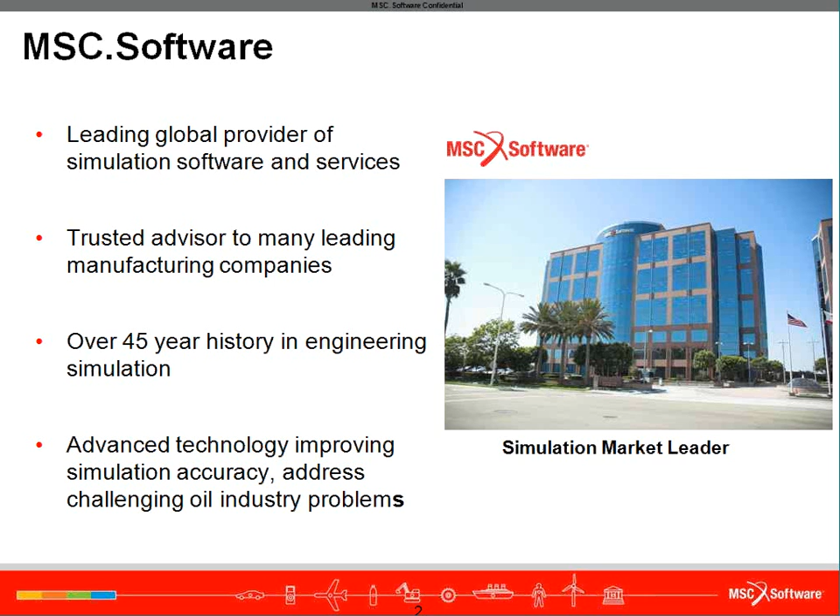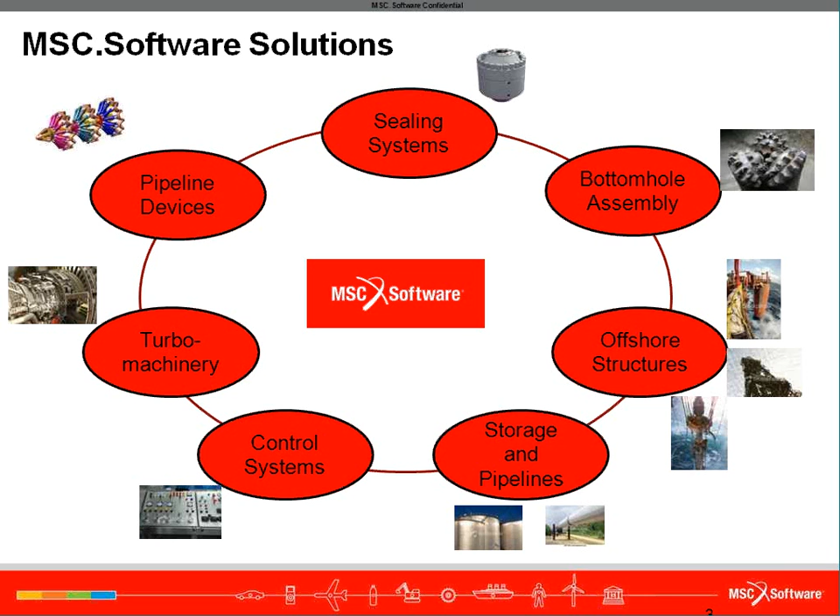MSC's solutions have applications in several segments of the oil and gas industry. A sampling of applications includes sealing systems, including packer seals and blowout preventers, bottom hole assemblies involving contact and wear and tear studies, offshore structural analysis, safety of storage and pipeline structures, control system efficiency, turbo machinery stability and safety, and the pipeline devices used to maintain and monitor these pipelines.

So with that brief introduction to MSC, let us now move on to the central topic of this webcast. After a brief review of the pipelines and the role of inspection devices, we'll go over some of the design challenges involved. After that, Anthony will introduce MSC's simulation solutions for these applications and then go over a couple of examples. We will briefly talk about MSC's solution to manage the simulation data, and then we'll have a Q&A session to address any questions that you may have on today's presentation.

Pipelines are very efficient transportation systems, both in terms of operational costs and energy efficiency. The large, complex network of pipelines spans hundreds of thousands of miles across the world, and depending on the location and usage, these pipes are of varying diameters, going from as little as 2 inches to as big as 60 inches in diameter. So depending on the location of the wells and the final destination of the product being pumped, the pipelines may be underground, undersea, or over the ground.

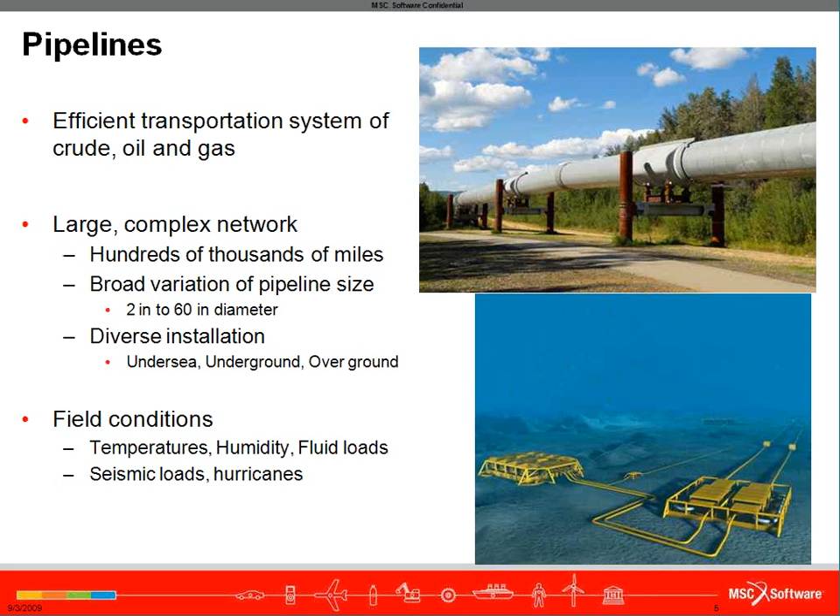As the oil wells are located in all kinds of climates and locations, going from Arctic permafrost regions to deep offshore or very hot desert regions, these pipelines have to withstand very punishing environmental conditions, including very low and very high temperatures, humidity, wave loads, and other corrosive environments. In addition, they should also withstand dynamic loads due to extreme weather conditions and earthquakes as well.

Failure of a pipeline could result in shutdown of that segment and could lead to excessive operational expenses and loss of revenue. The environmental and political impact of catastrophic failure could also be very significant. I'm sure everyone remembers BP's pipeline shutdown 3 years ago, just when the oil prices were spiking. To avoid failures and to maintain efficiency, continuous monitoring of these pipelines is necessary. Monitoring is also important because visual and direct maintenance is harder, since most of the pipelines are inaccessible, being underground or undersea. And even when they are over land, they could be in rugged terrain, making regular access very difficult.

Since energy is crucial for economic growth and also due to environmental impact concerns, government regulations affect their operations and maintenance. In the U.S. alone, the National Environmental Policy Act, Clean Air Act, and Pipeline Safety Improvement Act are just a few of those that affect the installation and maintenance of the pipelines.

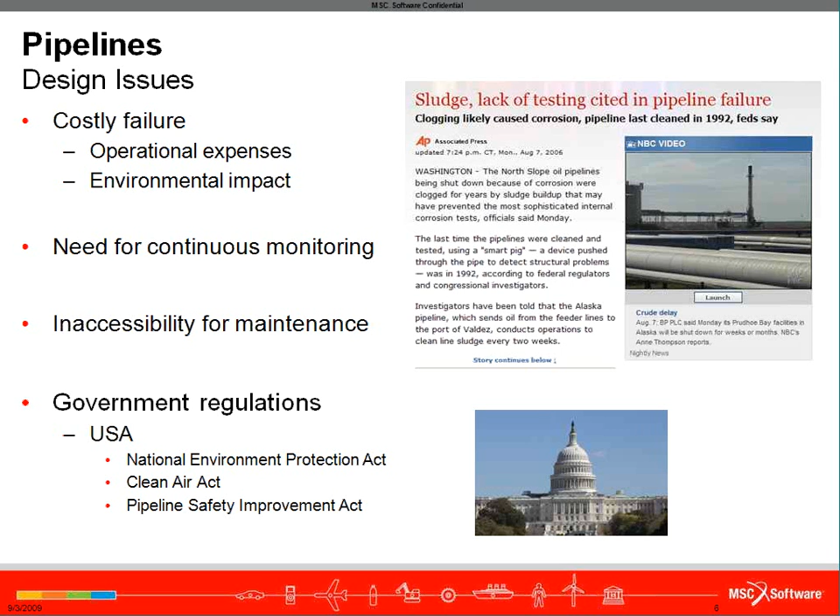One tool that is indispensable in pipeline monitoring and maintenance is the pipeline inspection gauge, also called a PIG. Basically, a PIG is any device that is inserted into a pipeline that can travel freely through the pipeline. PIG, of course, is a backronym for the devices used to handle several operations related to pipeline maintenance and monitoring. They're used both during commissioning and operational phases.

During construction, soil and construction debris could make their way into pipelines and cause problems during operation by blocking downstream filters or damaging pump impellers and so on. By running a debris removal PIG, operators make sure that the pipes are cleaned up before usage. And often the landline debris removal operation is combined with gauging to detect any kind of dents and buckles. This ensures that there is a circular opening from one end to the other. It is even more critical in offshore operations to ensure that any areas susceptible to buckling are within the acceptable tolerances. And PIGs are also quite helpful during cleaning operations, flooding with water, and dewatering stages as well.

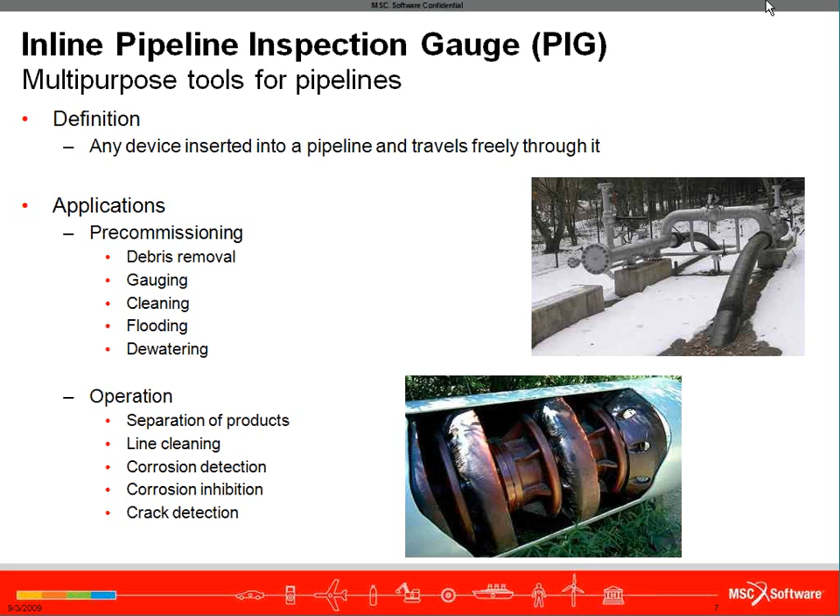Based on the tasks that they perform, PIGs can be classified into two main categories, utility PIGs and smart or intelligent PIGs. Utility PIGs perform a specific task in maintaining the pipeline. Examples include those involved with debris removal, dewatering, and so on.

A smart PIG, on the other hand, measures and records information that is used to assess pipeline integrity or perform non-destructive assessment of pipeline defects or bore diameter. Smart PIGs came into use in the 1960s and are finding increased usage in monitoring of pipelines. There are three main types of smart PIGs based on the technology that is used.

Caliper PIGs have an array of levers and are connected to a recording device in the body. As the pigs travel through the pipeline, the deflections of the levers are recorded, and the results can show details such as girth weld penetration, pipe ovality, and dents.

The next one is the MFL, or magnetic flux leakage pigs. They use a more sophisticated technique to determine the wall thickness over the entire pipe surface, as well as picking up any dents and buckles and pipe ovality, just as in caliper pigs.

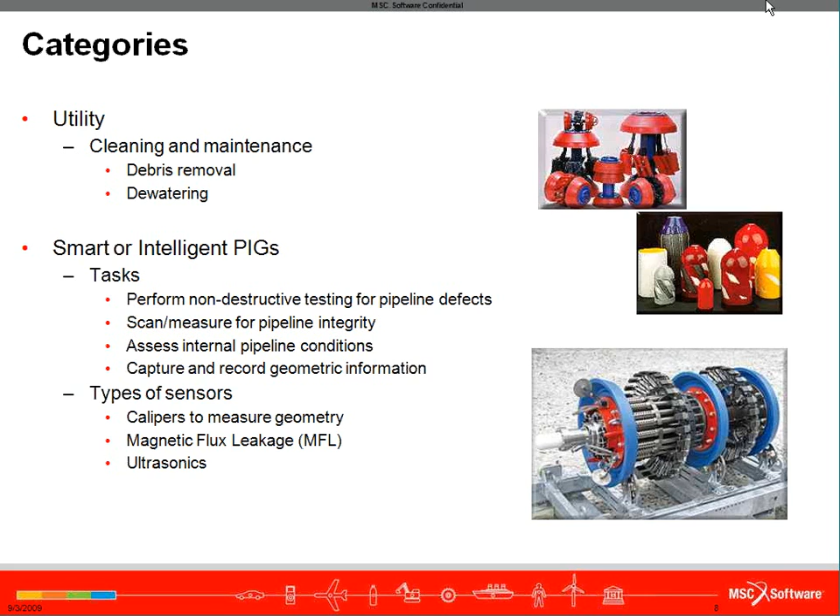So when designing smart pigs, or for that matter any pigs, designers should consider that these pigs need to traverse very long distances in a single run without getting stuck. They could be run for tens or even hundreds of miles in a single inspection run. So retrieving a stuck pig would actually be much more expensive than a pig that just fails to perform the inspection task but makes it to the retrieval station.

The pipeline diameter varies across the length of the pipe, and so the pig should also manage the transition smoothly, and the same goes with the curved sections as well. There are also several standardization specifications that need to be accounted for by the designers in the designs.

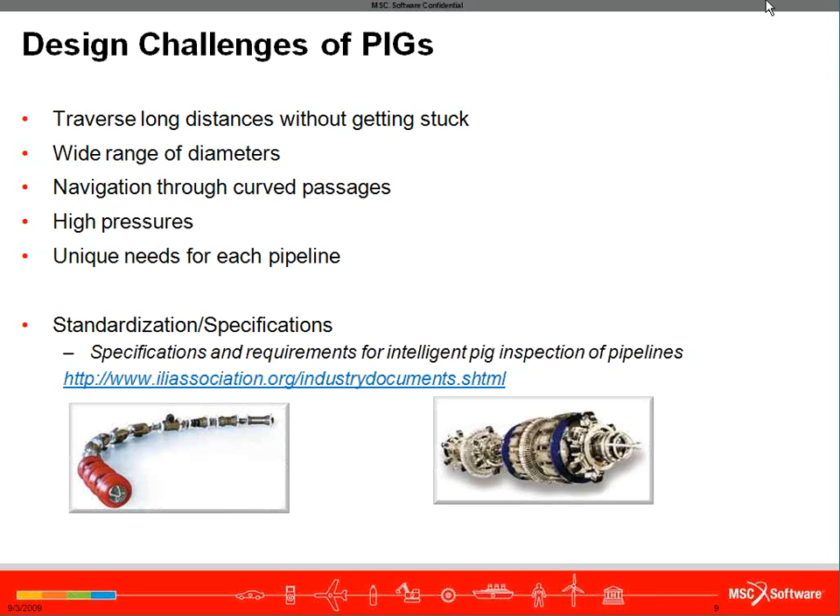Obviously, physical testing of all these pigs for all the possible scenarios is not only expensive, but also very time-consuming. So a trial and error solution can slow things down and possibly lead to a suboptimal design as well, because you don't get a chance to try out a lot of different variations. Simulation helps with virtual testing of the pigs prior to getting your final prototype, thus saving design and development time and other costs.

So at this point, I would like to turn it over to Anthony, who will discuss how simulation and specifically MSC solutions help you tackle the virtual testing issues and go over some examples. Anthony, please take over.

Thanks, Srinivas. I'll now present some topics related to multi-body dynamics modeling of pigs with Adams software. I'll start by showing where Adams fits within MSC's product portfolio, after which I'll briefly describe what multi-body dynamics simulation is and why so many companies use it. Then I'll explain why Adams is an excellent software tool for this kind of simulation. Finally, I'll present two pig modeling examples. The first comes from a project from one of our customers, and the second is an example model from MSC, which we'll investigate directly within the software.

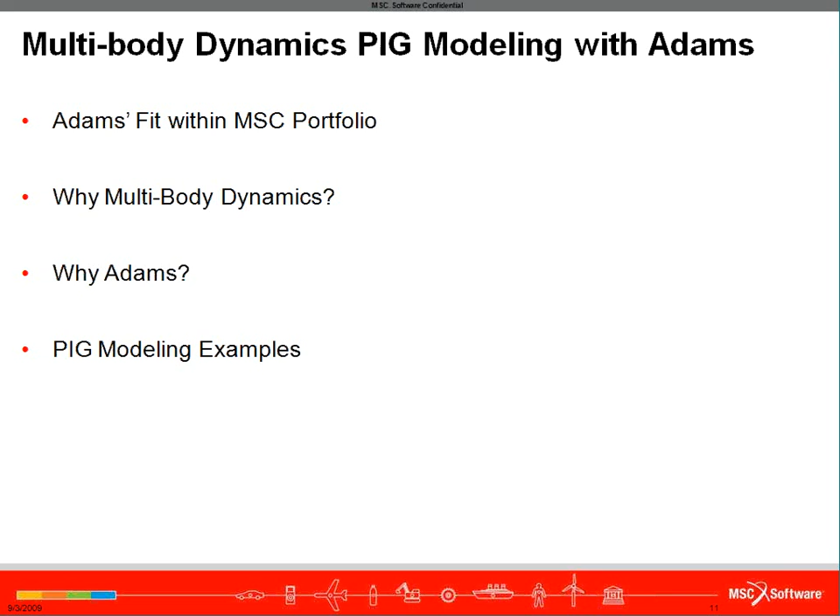MSC's product portfolio is aligned with our customer simulation initiatives. Our customers create virtual prototypes, manage the data and processes associated with them, and partner with trusted industry experts to develop new methodology and best practices, and to apply the tools to new platforms.

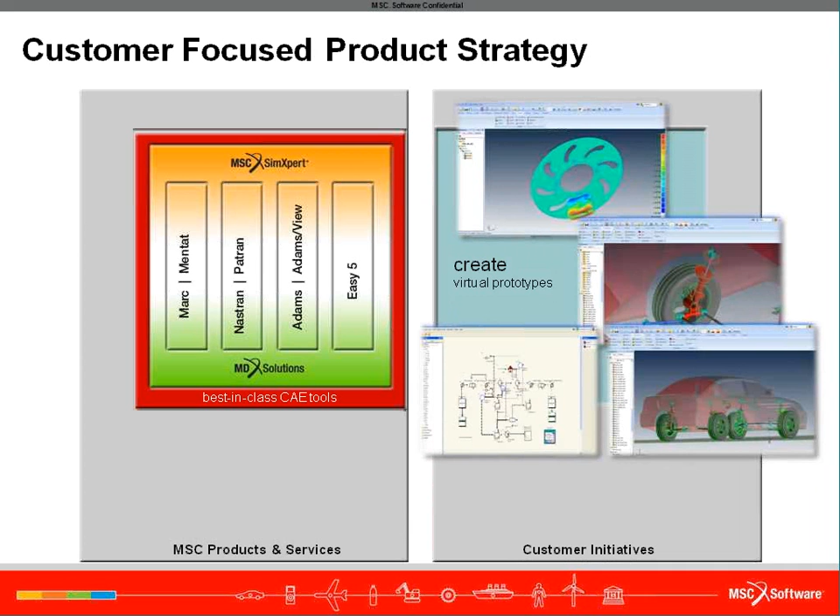Supporting the creation of virtual prototypes are MSC's CAE tools. Alongside our offerings for linear and nonlinear finite element analysis and other disciplines is the Adams product line, our core solution for multi-body dynamics. Supporting the management of CAE data and processes is our Sim Manager tool.

And finally, our services team offers a broad wealth of expert knowledge and experience to assist our customers in expanding their virtual product development capabilities and pushing the envelope in the simulation world. Together, these pieces enable our customers to achieve their goals of improving and accelerating their product design cycles, optimizing the methodology of product design, and shaping the future of engineering and product development.

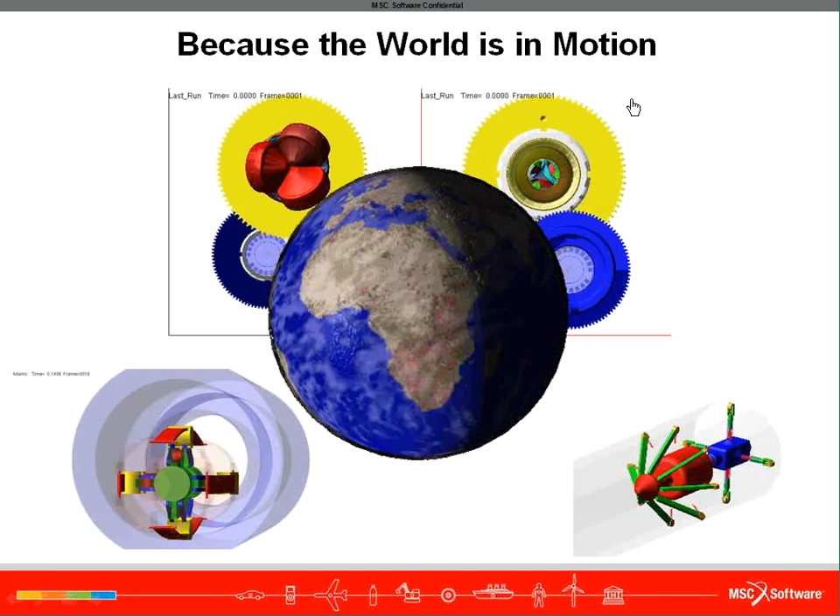Now we've established that Adams is MSC's solution for multi-body dynamics, or MBD for short. Well, let's answer the question, why engage in multi-body dynamic simulation at all? Why? Well, because the world is in motion. The things we work with, the things we design, the things we engineer, they all move. So multi-body dynamics is required. A few examples of things in motion related to the oil and gas industry are shown here.

This is an animation of a model showing gears in a drilling application. This here is a centralizer for pipe tools. Again, an Adams model animation directly from the Adams post-processing tool. And last, far from least, the subject of today's webinar, a pipe survey device, a PIG.

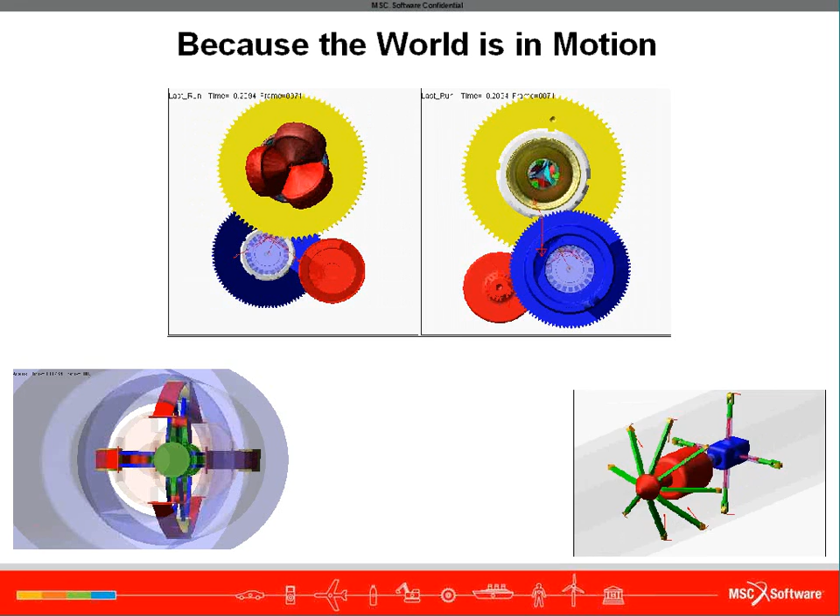Okay, moving along. For those of you unfamiliar with MBD, I'll provide some background. Multi-body dynamics is the evaluation of any system comprised of bodies. In the parlance of Adams, these are known as parts and can be rigid or flexible. Acting on these parts can be a variety of constraints, either ideal or complex, as well as forces applied from external of the system or as a result of interactions between the parts. MBD solutions enable a system-level analysis, allowing us to study the interaction between multiple components in an assembly.

Let me address two terms often applied to this discipline. The first is kinematics. Technically speaking, this term's application is limited to zero degree of freedom systems. That is, a system where all of the motion is prescribed exactly. It is often used to refer to simpler analyses, sometimes even non-zero degree of freedom systems, consisting of motion-driven systems, frictionless connections, ideal joints, and the like, useful primarily for basic motion visualization.

It sometimes is, but should not be, confused with the second term, dynamics. Technically speaking, this term is applied to multiple degree of freedom systems. In general, it's referred to as covering far broader capabilities and modeling complexity, such as force or torque-driven systems, realistic connections representing things like slop and friction, the inclusion of flexible bodies, contact modeling, etc. Most applications of Adams fall within the realm of what we call dynamics. PIG modeling is no exception.

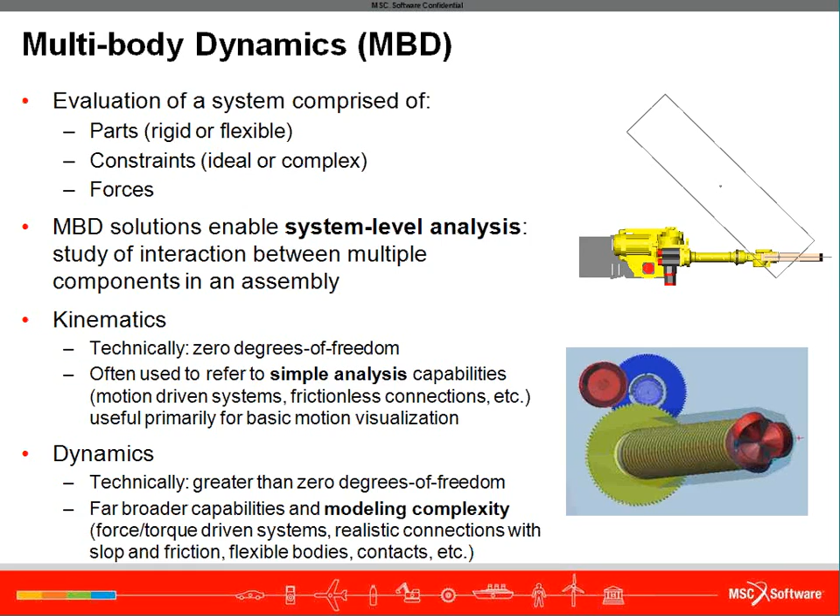I'll now describe some of the product design challenges to which MBD analysis is often applied. First, system-level analysis. Many design problems stem from a lack of understanding or anticipation of how a product's components interact with each other and their environment. This really requires a subsystem or even a full system level viewpoint. Let me illustrate what I mean with an example from a services project I once worked on for a customer.

A brake noise warranty issue came up on a car. The OEM blamed the supplier and wanted cost relief. The supplier couldn't replicate the noise on bench tests and believed the issue to be an interaction between the brake and the suspension. It turns out that during certain events, the brake was exciting a natural frequency in the suspension trailing arm on which it was mounted, which produced the audible noise.

A detailed model of the brake on the vehicle suspension, which included a flexible body representation of the trailing arm, supported this theory. The Adams model was then used to test countermeasures on both the brake and the suspension, one of which, a stiffening ridge stamped into the suspension arm, was the solution ultimately implemented.

System-level analysis is really an overarching theme that touches on many of the other design challenges listed here. The next of which is the prediction of loads. Static loads are often easily predictable and well understood. Dynamic loads, however, are far more difficult to predict and understand.

Take a washing machine, for example, here, as shown in this animation. Sitting static on its suspension, it's not so complex, but place an unbalanced load in a basket rotating at several hundred RPM, and you have a more difficult problem. The movie I played showed how moving some of the components on the outside of the tub helped Sanyo reduce the displacement of one of their industrial washer designs.

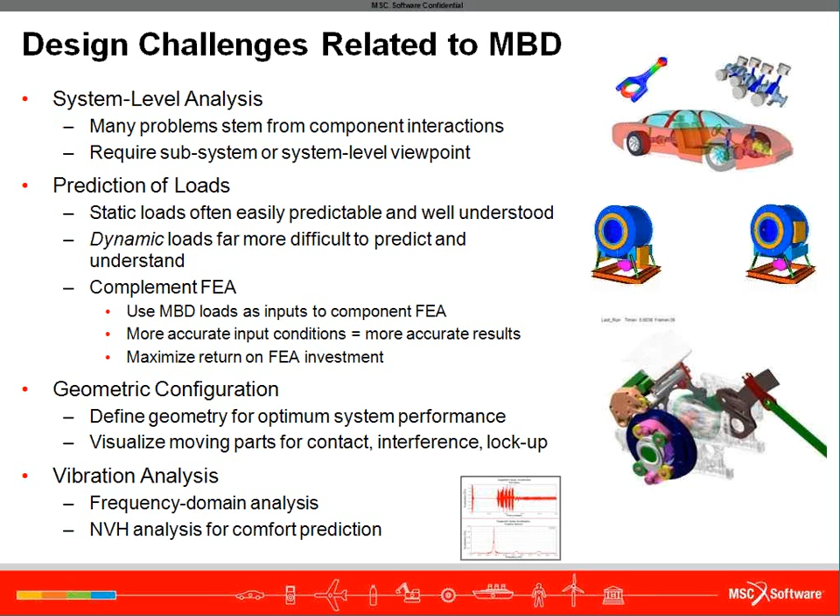MBD is also often used to supply an accurate mechanical model for control system modeling. After all, one needs to understand the mechanical system being controlled. This can be difficult in a system with several moving parts, complex interactions, and dynamic phenomena. MBD provides this representation. For pigs that are self-propelled by a motor as opposed to propelled by flow, this can be very useful for motor sizing and design.

Naturally, MBD is an efficient solution for problems with moving parts. MSC often encounters folks trying to do too much with FEA and applying it to problems for which it's not well suited. This can cause excessive run times. An MBD solution is often more efficient than FEA for systems with many moving parts that can be represented as rigid bodies. MBD simulation enables representing flexibility and compliance only where really required. With all their moving parts, many pig applications would not be well suited at all to an FEA-only approach.

Finally, like other simulation disciplines, MBD allows folks to benefit from design study, DOE, and optimization techniques by quickly assessing multiple design variants so that the interaction factors can be understood and an objective versus parameter response surface can be defined.

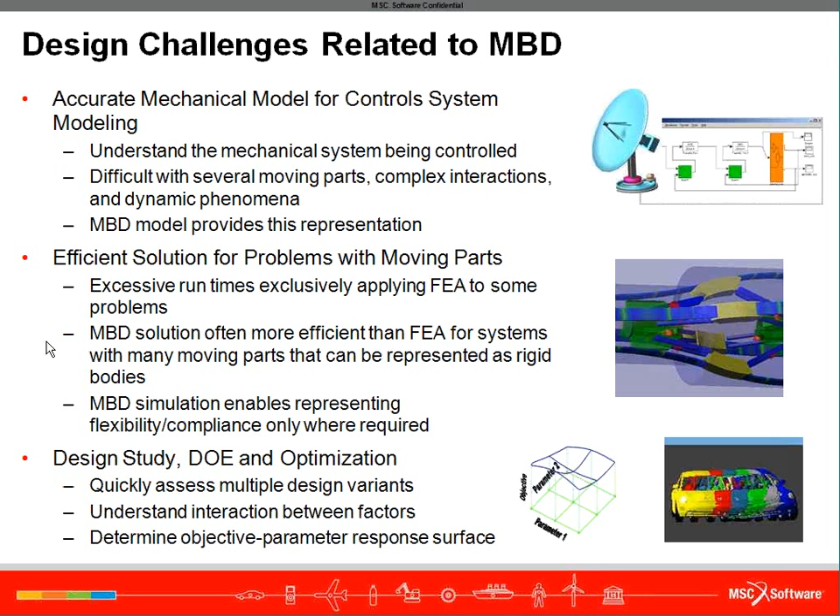Also, it should not go without saying, especially to those of you new to simulation in general, that the general benefits of simulation, which MBD as a subset of simulation provides as well, are part of the MBD picture. Accelerate innovation by exploring multiple design concepts quickly and efficiently so you can reduce your time to market.

Increasing product quality is another benefit. Simulation can help you to identify issues prior to production and reduce warranty claims, as well as quickly develop countermeasures whenever issues are discovered. Don't get me wrong, we always want to avoid and address problems upstream. The reality is that problems may still occur late and put us in firefighting mode. This is also a valuable time for simulation. Many of our customers first get involved with us during such crises and then go back later and revamp their design processes to include more simulation earlier.

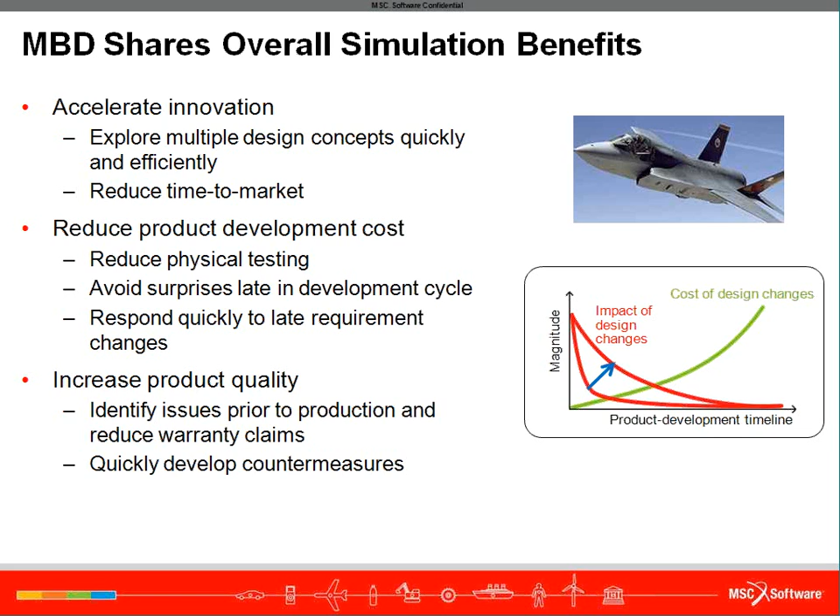Well, now that I've discussed why MBD, let me touch on why Adams is an excellent choice for your MBD solution. The Adams product has over 3 decades of development, innovation, and industry leadership, and is the most widely used mechanical system software in the world. It has great depth and breadth of functionality, allowing you to address all the topics discussed earlier, and this is balanced with ease of use and customizability for specific industry applications. This is achieved through MSC or third-party product plugins, as well as by direct functionality in Adams, allowing users to customize the interface and automate the modeling process.

And because Adams is the most widely used software in its space, there's a large, diverse, active user base with which to interact through conferences, our online user forums, and the like.

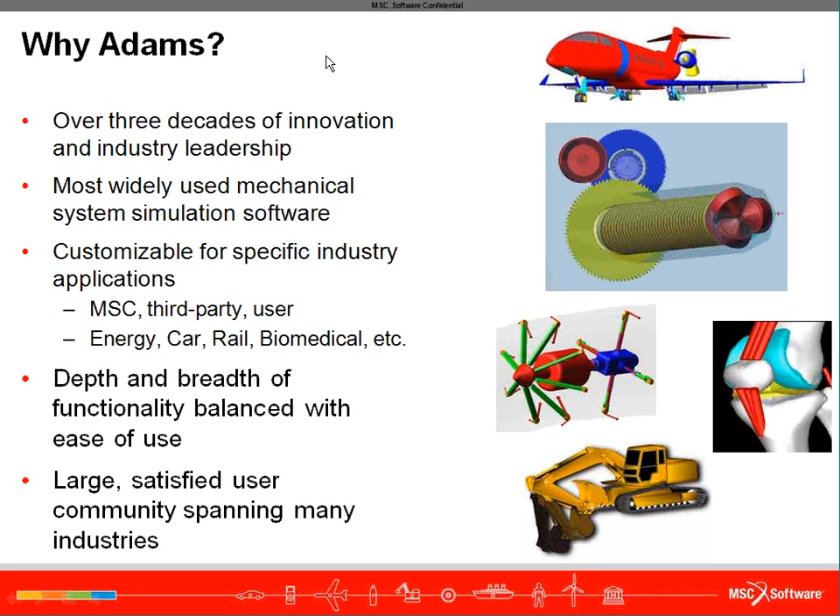Okay, moving on to the example section of our presentation. Let's now take a look at 2 pig modeling examples. This first one comes from one of our customers, Pipetronix. They're now a part of GE Energy. They presented this model at the 2000 International Adams Users Conference.

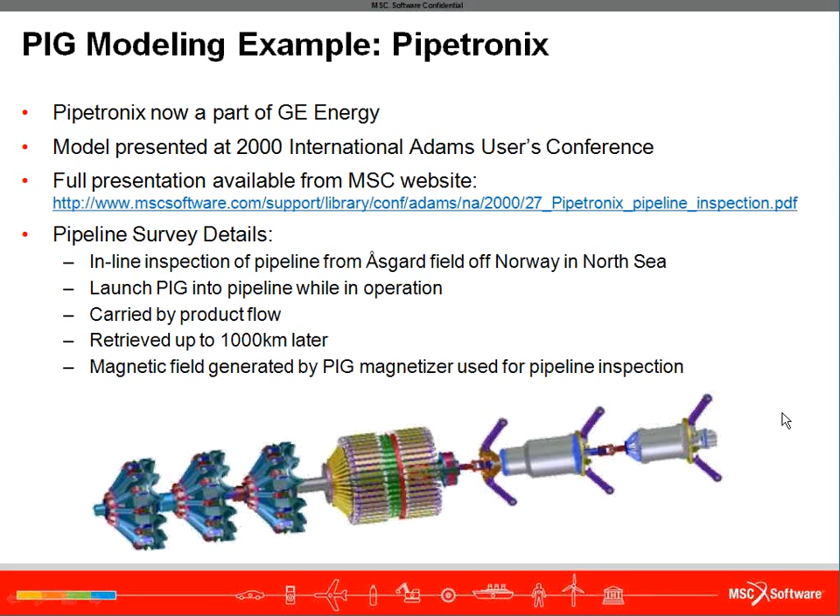The primary challenging requirements for this device were as follows. It had to have a 28-inch compressed diameter at launch, must be able to travel via a service riser or be launched subsea at a depth of 300 meters. The pig has to travel the export riser base and a section of 28-inch diameter pipeline, travel the transition cone, and then travel 800 kilometers of 42-inch diameter pipeline to shore, including a landline and a crossing of 3 fjords.

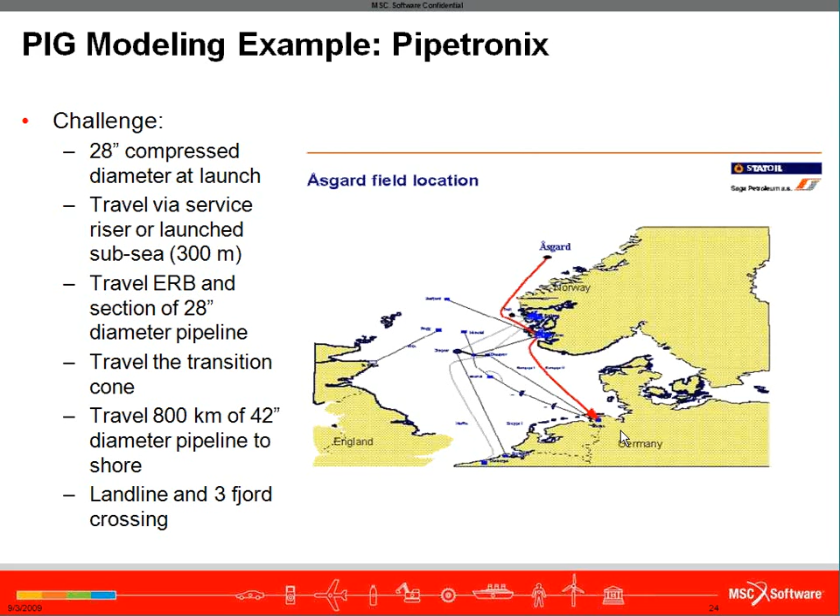Now let's discuss the model a little bit. The model was started from geometry and mass properties imported to Adams from their CAD model. The flow-based propulsion was represented by 5 force elements applied to each of the 36 tow arm cup elements. These are the tow arm cup elements along here in the tow sections. The locations of these 5 force vectors are shown on the diagram here as F1 through F5. Here and here, here, and down the middle here.

These forces are a function of pipe diameter, and the defining functions were based, at least in part, on empirical data. A combination of various Adams constraint types were used to properly connect the tow arm and magnetizer linkages so as to represent their ability to expand and contract. In total, 865 separate contact forces were used in the model. The force values and contact detection all referenced a Fortran subroutine, which was called by the Adams solver during the simulation. This technique, while efficient, is no longer necessary, as you'll see in the next example.

As you can see, this model has many repeated components in the tow arms and magnetizer. The analyst took advantage of the Adams scriptability to create macros, which can be played back to quickly repeat modeling construction steps and vary the number of all of these repeated components.

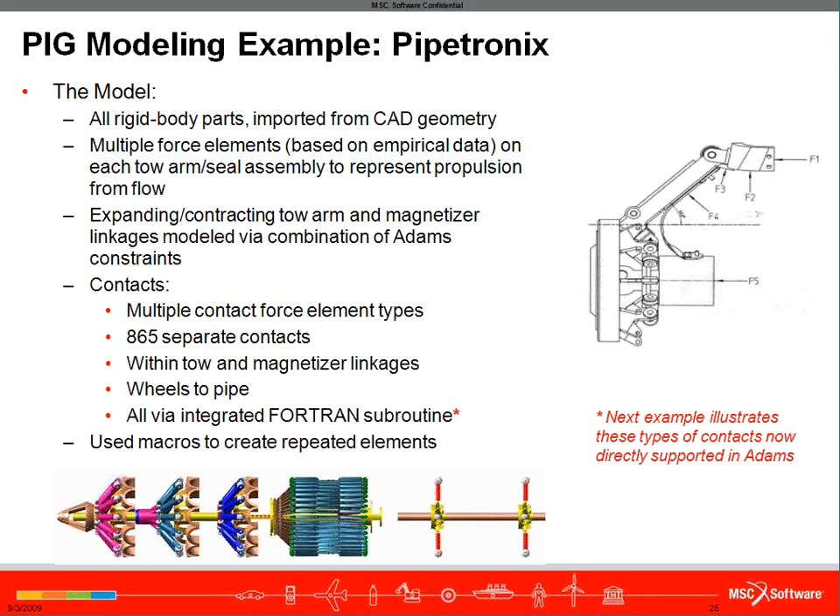This model was used primarily to investigate dynamic loading of the pig's various mechanisms, especially the relatively delicate magnetizer linkages, and it was used to assess the ability of the pig to traverse the pipelines, transitions, welds, and bends. Pipetronix presented the conclusion that, quote, Adams provided comprehensive data which contributed to the understanding of system behavior prior to completion of hardware prototype and testing. These folks clearly understood the value of performing this kind of analysis upstream in the design process.

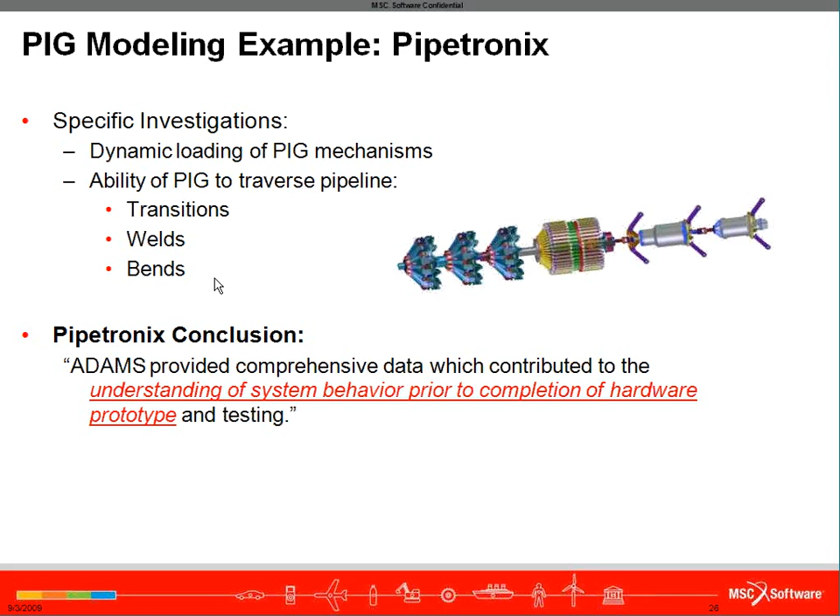So, moving along, next I'd like to show you a demonstration model of a pipeline survey device. The animation here shows the model as it traverses a sample test course, just to give you an idea of the model itself and the simulation event it traverses.

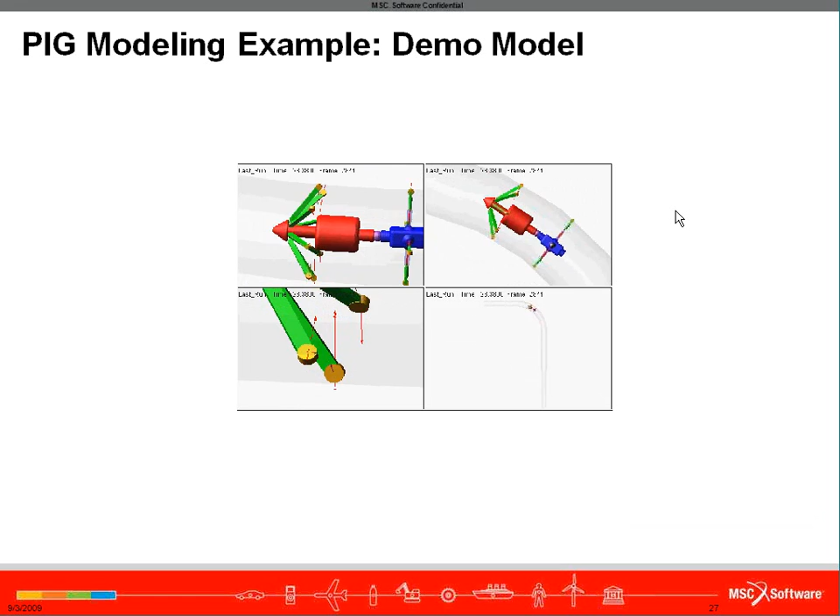Okay, I developed this model as a generic representation of a pipeline survey device. None of the geometry or model parameters intentionally represent any actual devices in production or development as far as I know, but I tried to make it somewhat representative of a likely scenario. This model is far simpler than the Pipetronix example previously shown. I have just 2 units, a front unit and a rear unit. The front consists of 8 arms which are mounted to the base by torsional spring dampers whose preloads are used to maintain contact with the interior pipe wall.

The front unit is the towing unit. It has a simple single force applied down the center line of the pig that is fit with a basic PID controller to achieve and maintain a constant velocity. The rear unit is coupled to the front and pulled along. It has only 4 arms made of struts connected via translational spring dampers, which similarly are preloaded to maintain contact with the interior pipe wall.

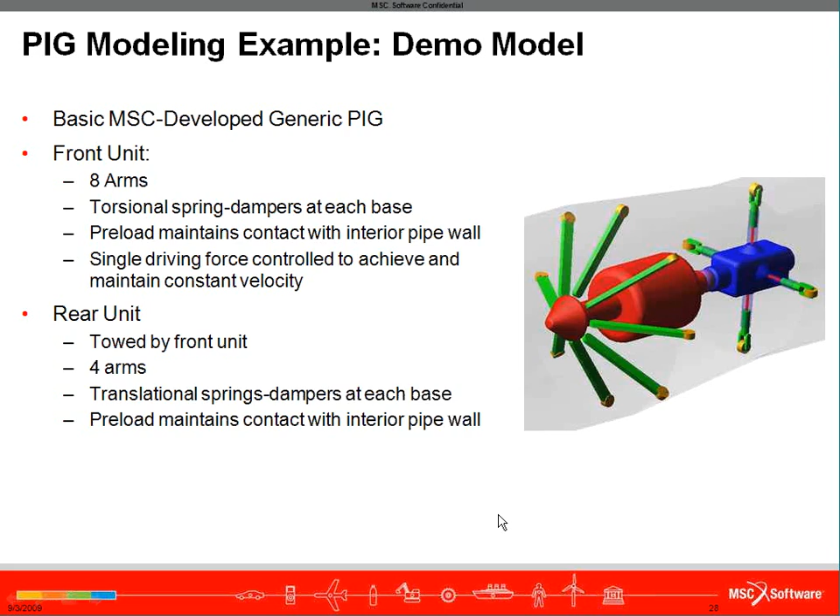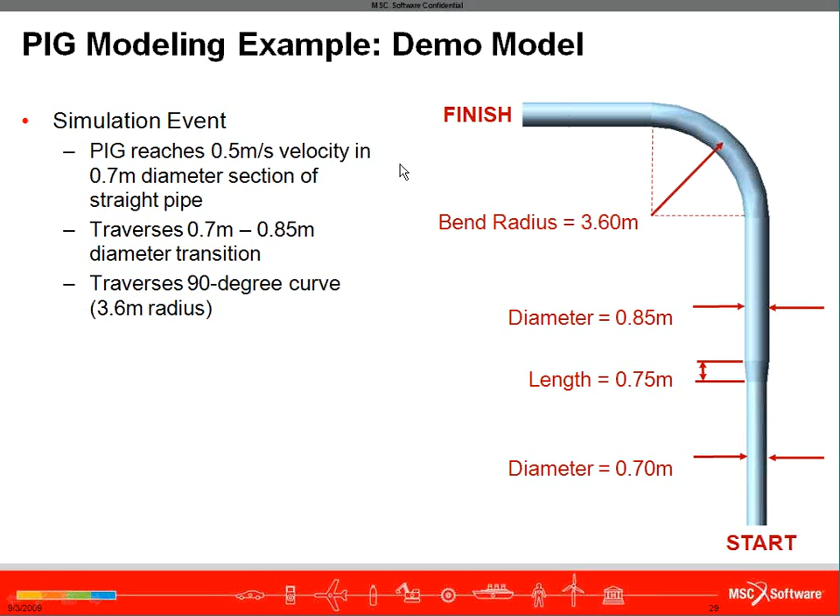The key feature of this model from a product functionality standpoint is that it takes advantage of the most recent generation of Adams contact modeling capabilities. Back in 2000, none of this functionality was built into the tool directly, so they had to write their own functions and chose to do so via an integrated Fortran subroutine, as we learned just moments ago. Since then, several types of contact modeling capabilities have been built into Adams.

Today, these include solid-to-solid contact for 3D rigid and 3D flexible bodies, as well as contact for rigid body 2D elements. Any combination of supported bodies is allowed. Also, spheres are treated with an analytical method which uses the geometric property of the solid to reduce the time required to compute contact information. Other rigid solids use the so-called rapid method, which uses tessellated surfaces to detect contact.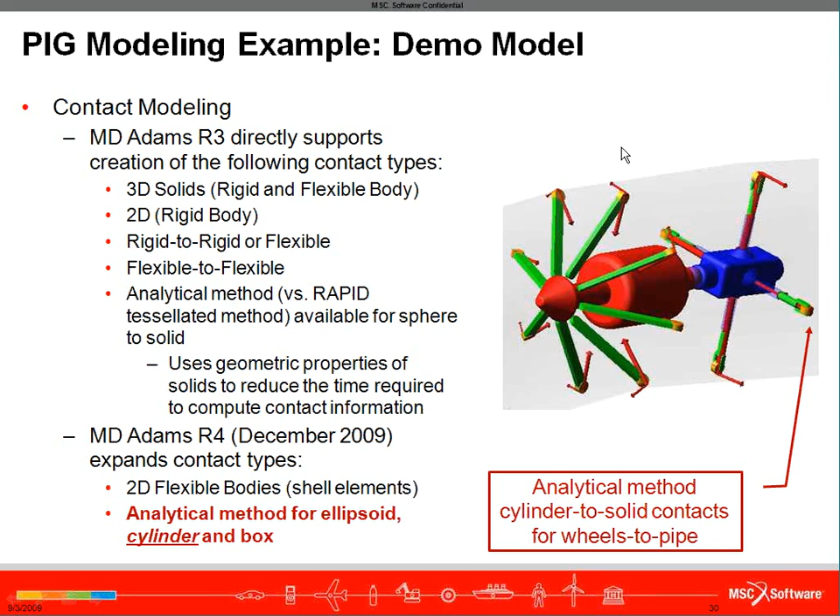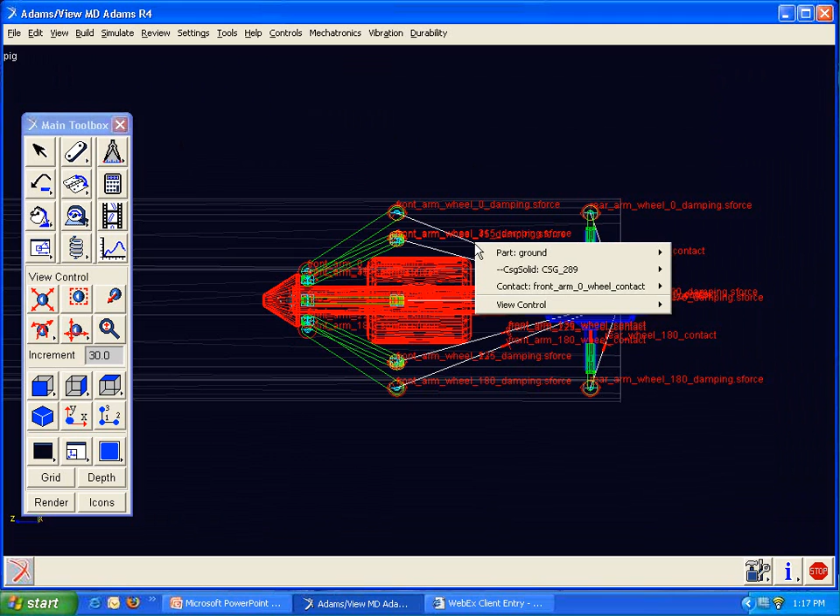So I'll now switch to an Adams session so we can take a closer look at the model live in the software. So this is Adams, and this is the model in the software preprocessor Adams View. Let's take a look at one of the contact forces here between one of the front arms and the pipe. If I select Modify, you can see all the properties of the contact force. Very simple. It simply bases itself on two solids, any two selectable geometries. So it's very quick to create.

I have some settings here that define how the normal force is defined. We use what is called an impact function in Adams, basically a Hertzian stress theory-based contact model. So it looks for an intersection of two solids and then applies a stiffness, which is raised to a certain exponent, as well as applies a damping that's ramped on across a certain penetration depth. Friction is also modeled in these contacts, a Coulombic friction model with a static friction coefficient and a dynamic friction coefficient, which transition across a given velocity span.

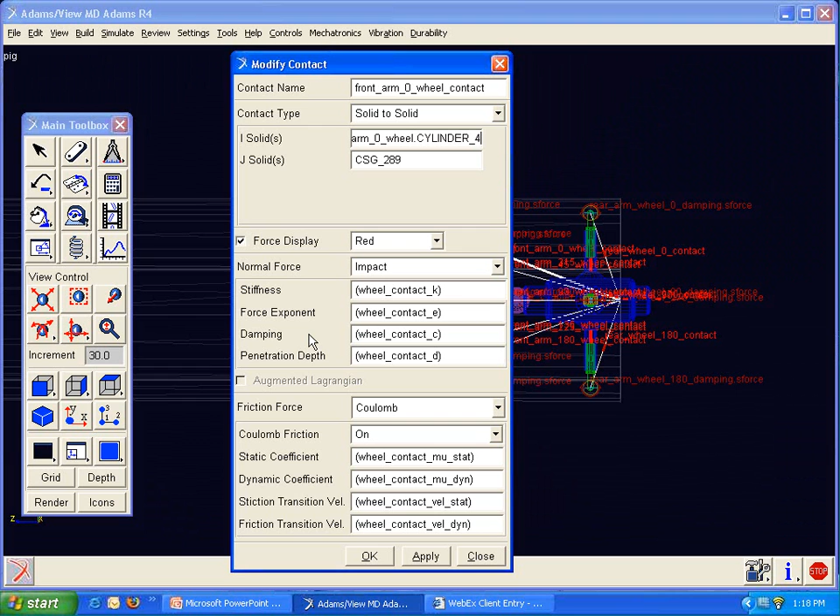Just to look at the ease of creating these contacts, we'll actually delete this contact here and recreate it briefly. So in order to do this from our force palette, simply select the contact force item, and then I can simply pick the contact solids I'd like to use, either directly clicking in here or right-clicking and finding the cylinder I'm primarily interested in. So I picked the two solids, and that's all that is required to determine the bodies that are going to contact. I don't need to set up any predefined contact regions or contact detection regions. Just simply tell it two bodies, and whenever they contact, please turn on the force.

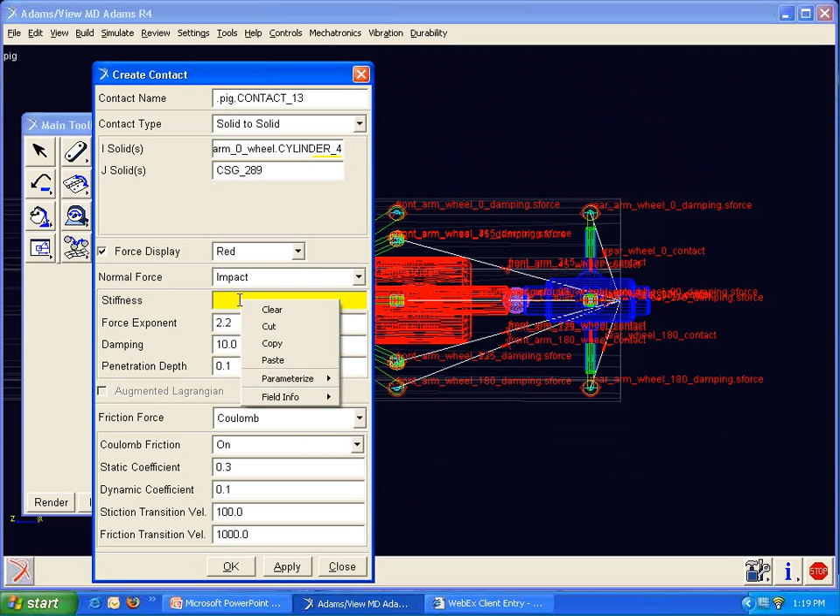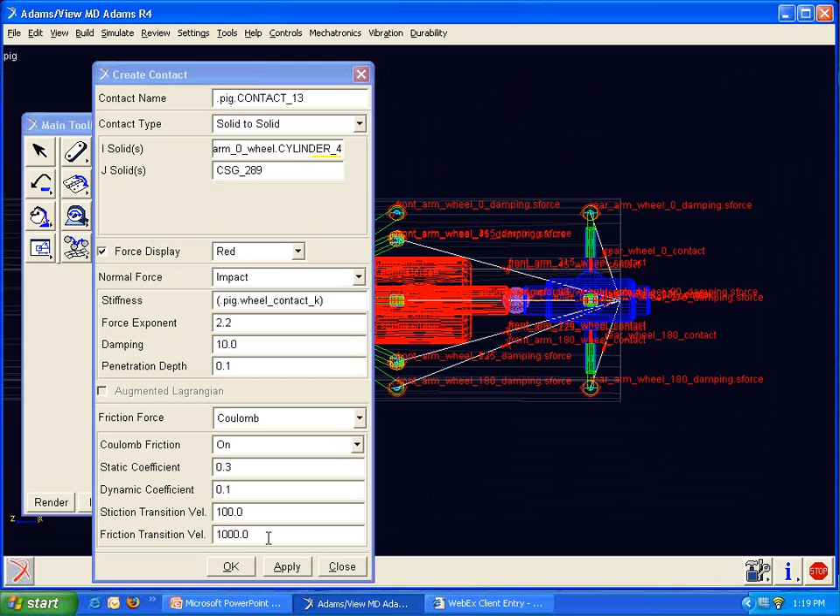Defaults are applied here. I've fully parameterized the model so we can actually look at referencing design variables for these things. So I've set up design variables for all of my contacts. So I could apply my own contact design variables here, wheel contact K, the same one that's used in all 12 of my contacts. So all I need to do if I would like to change the contact parameters is edit any of these design variables. And we'll go through and fill all these in, but you get the idea. Very easy to create this contact, and all of a sudden there it is. My contact force element has been created and it exists.

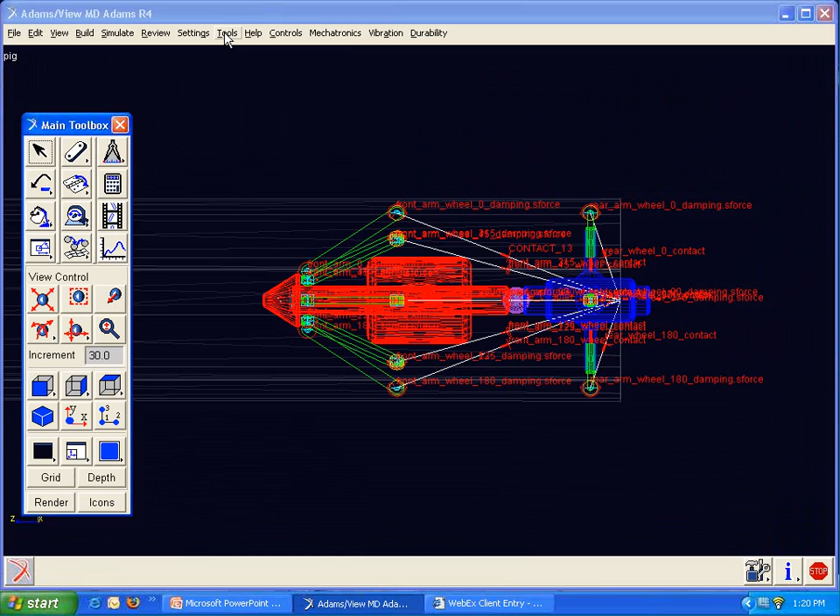There are also springs in this model. As I mentioned before, you can see the preloaded springs are existing at the bases of both of the front and rear units. Their properties are parameterized as well. If we look at one of these springs, we can see again we're referencing design parameters for these three spring properties. And again, because these are spring properties that cover all the various front springs, for example, I can modify those single properties by something like our table editor here. I can go through and modify any of the spring preloads in the front or the rear, or any of the other spring properties in the front and the rear, very quickly and very easily through this interface.

So let's take a look at the post-processing tool. This is the tool I used to create some of the animations you saw, and it's also the tool we use to investigate any of the results, both plotted and animation, as you can see here.

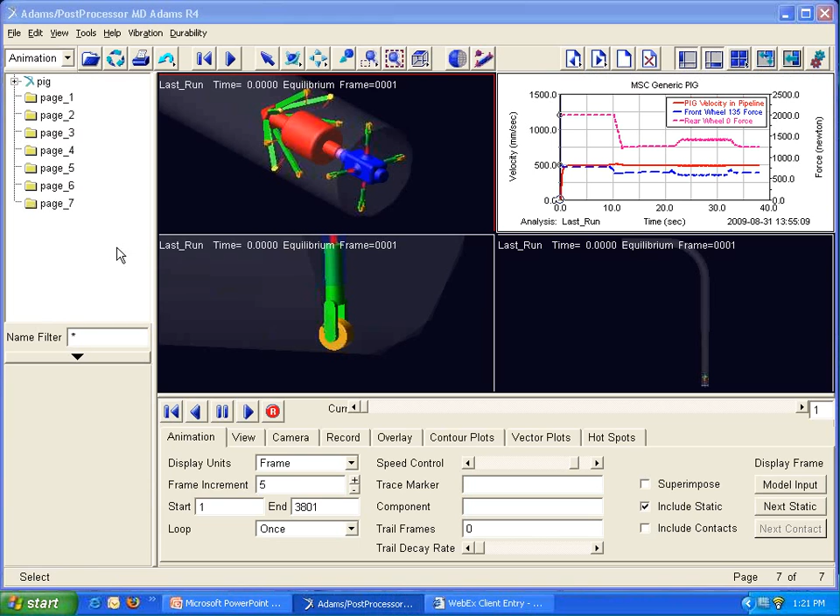So what I'll do here is animate the model and run it through its course again. This time we've got a four-view look at the model, three animations rolling here, all staying in sync, as well as staying in sync with this plot. So you can see as it just runs through the transition there, you can see the contact forces and the wheels drop a bit because obviously the spring preloads are unloading themselves, so they're not pressed up against the wall of the interior of the pipe so much.

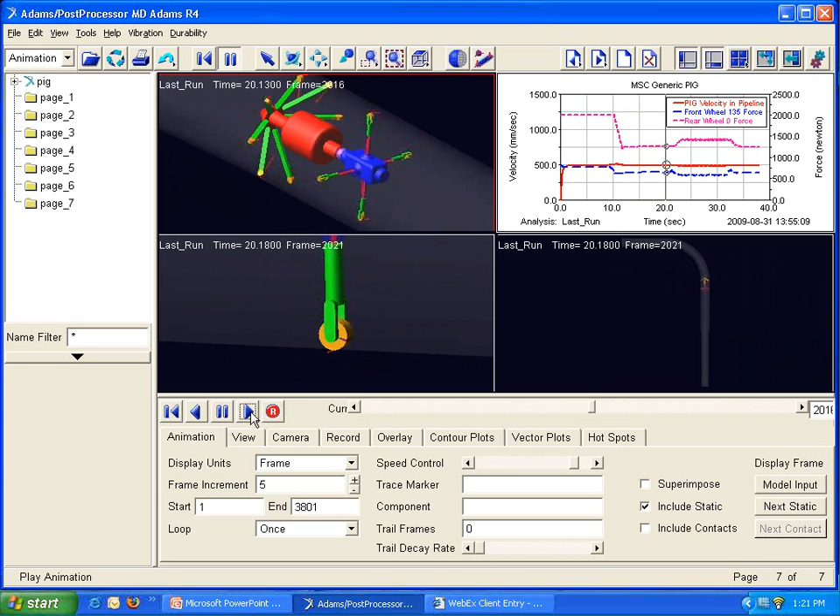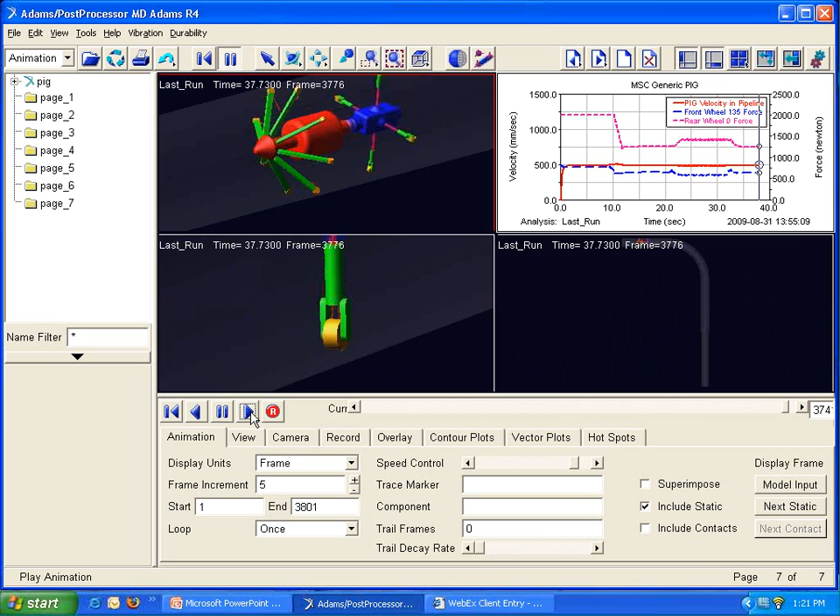And as we skid around the curve, a little more force is getting driven into the curve by spinning around the curve. And the red line here shows the velocity, shows that we're holding it roughly at 500 millimeters per second. Again, not perfect because it's held by a controller, so very true to life. Okay, we'll now return back to the PowerPoint presentation.

So I'll conclude. Let me reiterate the motivating business factors driving MBD analysis of pipeline survey devices like PIGs. There are two main factors here. One is to reduce the amount of costly physical prototypes required to get to a final product, and another is to avoid costly problems in the field, such as component failure, for example, a linkage breaking off, or pure PIG immobilization in the pipeline. Some PIG-specific design challenges which Adams can address to achieve these motivating goals are listed here. First is basic performance visualization to determine if the PIG can make it through the pipe.

Secondly, Adams models are excellent tools to determine component loading history from the complete dynamic system over the whole extent of an event. Another application is for mechanism sizing, be it spring properties, linkage dimensions, or understanding how these may be influenced by the effects of flexibility in the parts and connections. Motor development is another application well suited to Adams. One could use such a model to define the force and torque requirements of the driving motor, or more advanced, integrate the mechanical and control system models together. Adams offers a complete set of options here.

And last but not least, we are constantly pleased and surprised with the diverse and creative ways with which our customers successfully use Adams. I've no doubt that the oil and gas industry will continue to innovate in this regard.

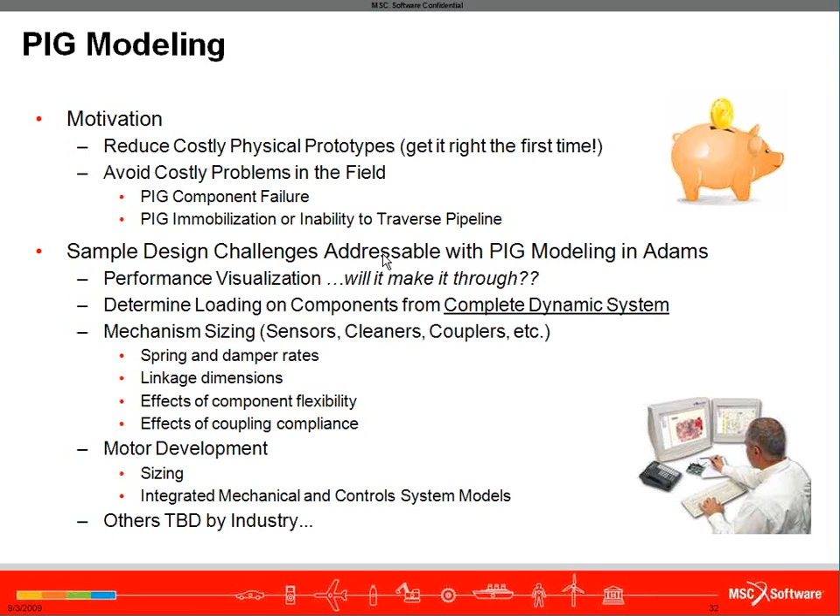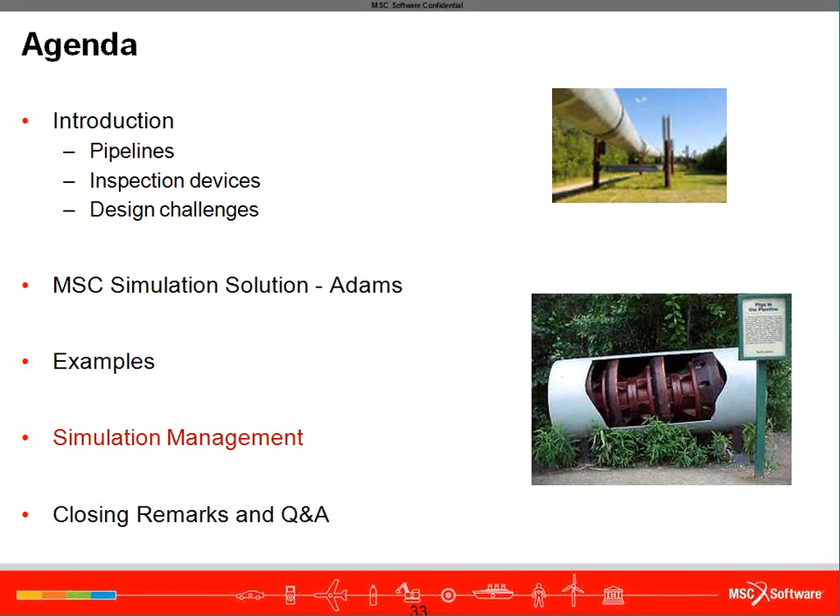I hope you saw the tremendous value that Adams brings to simulation of these very complex mechanical systems. I would like to switch gears now and talk about another but often ignored aspect of simulation, namely the simulation management itself. Using simulation often creates a lot of valuable data, which means any type of data that is relevant to simulation, all your models and model configurations, your CAD/CAM files, and your results or material properties, or any other type of method or template file that generated content for you.

So if these massive amounts and various types of simulation data are not managed effectively, it could result in poor reuse and knowledge sharing, in addition to communication and process inefficiencies within the company. So the real challenge is to get the simulation work done better, faster, and cheaper, and be able to run more and more simulations and improve the credibility of simulation by having complete audit trail information linking these results back to a design alternative that has been analyzed.

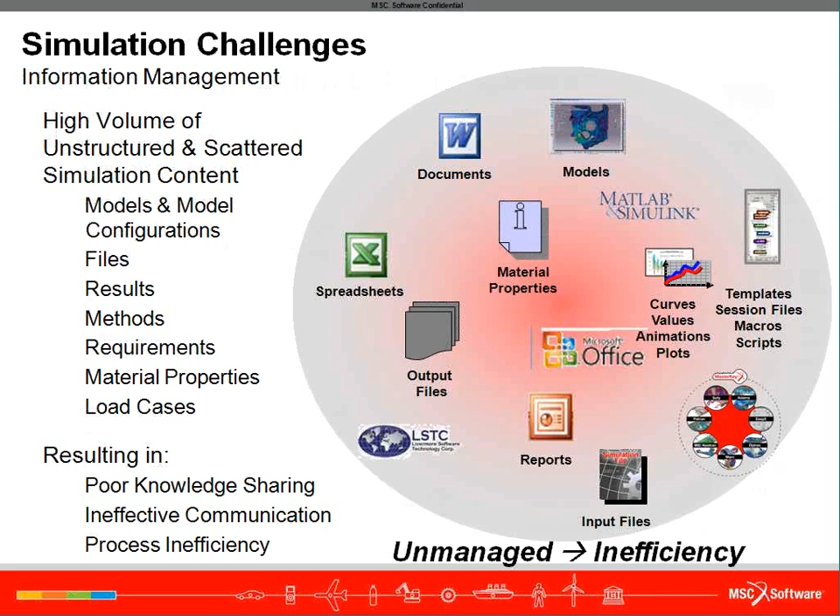SIM Manager from MSC Software offers the possibility for everyone to collaborate and get their simulation work done better, faster, and more reliably. It is a web-centric framework for sharing, collaborating, and controlling simulation data and processes. It represents the software infrastructure that will securely store, protect, and tie together all of your simulation activity. It is built using a services-oriented architecture, making it easily extensible and customizable to meet your needs. So through this web-based platform, your simulation data will be securely available around the globe, version controlled, and with secure role-based access control.

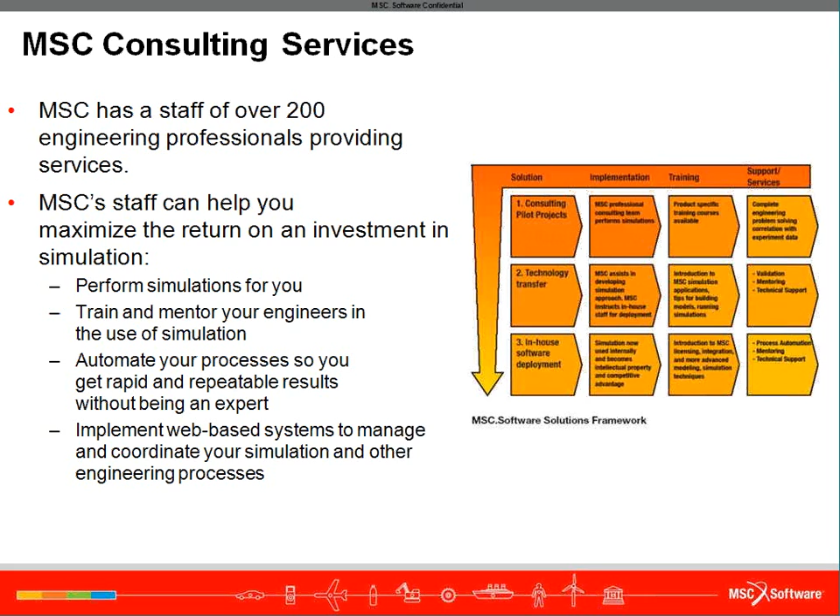So with that, let me summarize what we have covered in this webcast. Using MSC's simulation solutions, we have demonstrated how to analyze a complex system such as the pipeline inspection devices. In doing so, we demonstrated how multi-body dynamic simulation software like ADAMS can be used to virtually test your mechanisms and contact interactions between all the components of your entire system. We have also explained how MSC can provide simulation data and process management that can help improve your productivity. So in summary, MSC's solutions come with the advantages of providing accurate and robust solutions within a complete simulation framework, including your process management.